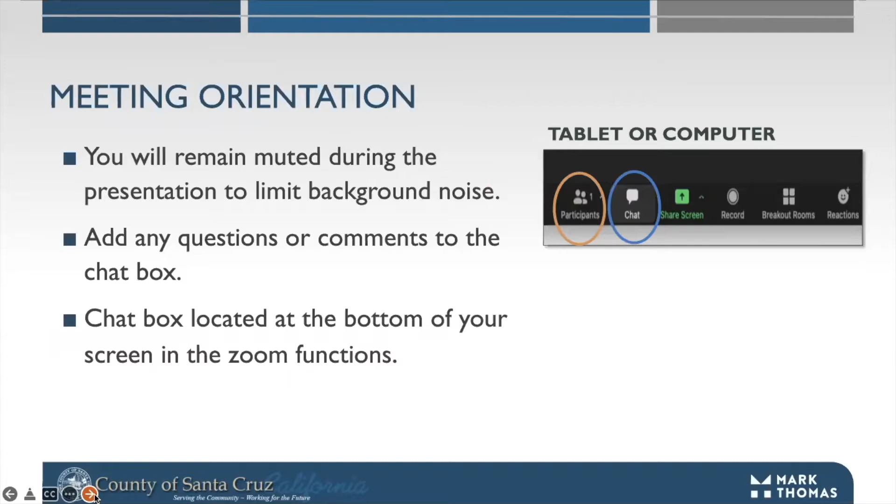So now I'd like to introduce who's on our project team. They'll be able to wave and acknowledge themselves as I introduce them. We have Russell Chen with Santa Cruz County, Tim Nguyen from Santa Cruz County, Steve Weisner also with Santa Cruz County, Jason Hoppin and Amanda Rotella both from Santa Cruz County, Sean O'Keefe and Dan Bloomquist with Mark Thomas, and as I mentioned myself, my name is Katie DeMayo, and my colleague Kayla Nick Kearney is with AIM Consulting.

I'm so honored tonight to welcome our next guest. We have Supervisor Zach Friend from the 2nd District to give us some welcoming remarks.

Thank you, Katie. I'm excited to be here tonight to talk about these remarkable possibilities that we have, not just along the Soquel corridor, although that's the focus of tonight, but this overall project funding, the congested corridors funding, is the largest investment in transportation equity and safety in our community's history. It's a pretty significant investment from the state of over $100 million.

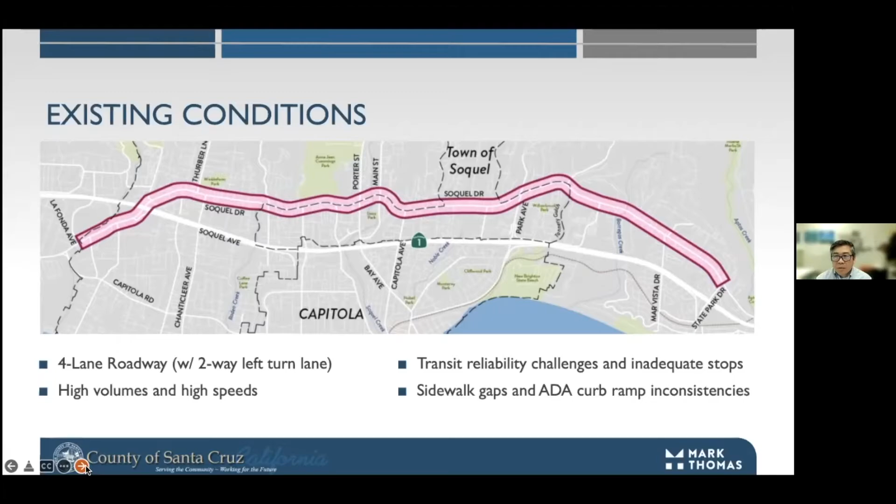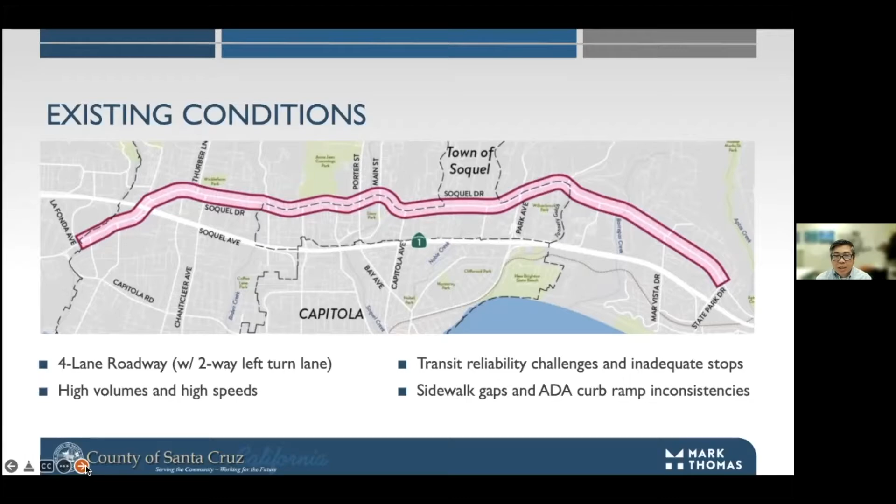We also have high speeds despite a 35-mile-per-hour speed limit. We have transit delays due to congestion. We have existing sidewalk gaps and ADA ramps that were built to previous standards. Those are general existing conditions on Soquel Avenue and Soquel Drive.

Now I'll go into the project goals.

One of our goals is safety, and one of the safety goals is bicycle safety. Santa Cruz County ranks near the top for California counties for the highest number of bike crashes. Something we're not proud of, but this project will help.

We also want to reduce traffic congestion, which will increase corridor throughput, reduce greenhouse gas emissions, improve emergency response times, improve access to housing, jobs, schools, and medical facilities. We also want to improve active transportation connectivity and promote sustainable development.

Next slide, please. Some background information. This project is part of the Watsonville to Santa Cruz Multimodal Corridor Program that came out of the Santa Cruz County Regional Transportation Commission's, also known as the RTC's, Unified Corridor Investment Study. The study identified multimodal transportation projects on Highway 1, Soquel Avenue, Soquel Drive, Freedom Boulevard, and the Santa Cruz Branch Rail Line. The projects identified will provide the greatest benefit to the community.

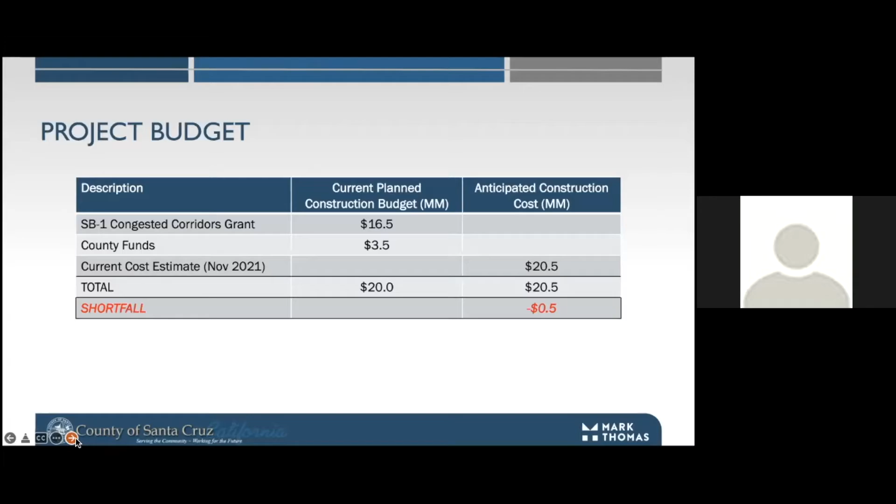The Santa Cruz County Regional Transportation also had extensive community outreach in developing this study. The county partnered with the Santa Cruz County Regional Transportation Commission on the Watsonville to Santa Cruz Multimodal Corridor Program and received the Solutions for Congested Corridors grant.

The grant amount was for $16.5 million. The county's matching funds were $3.5 million, for a total funding of $20 million. Construction estimate is about $20.5 million. There's a shortfall of about $500,000, so we're seeking additional funding, and also we'll be doing some value engineering on that as well.

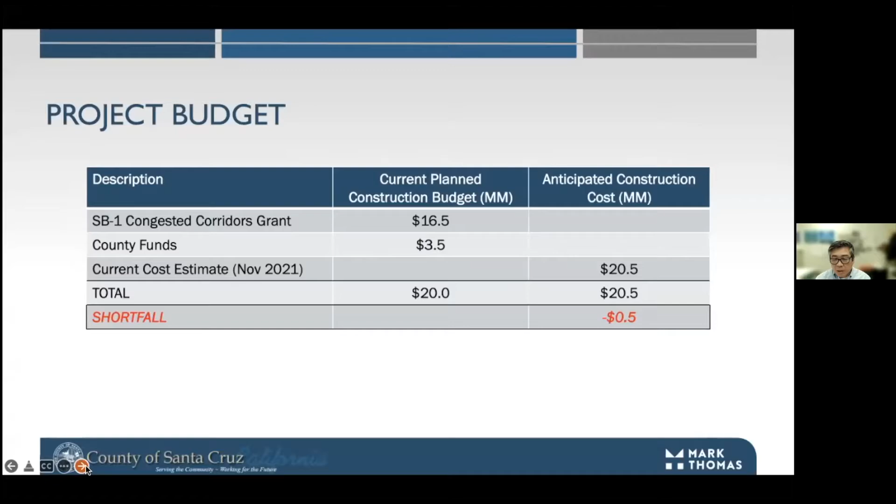With that, I'd like to turn it over to Sean O'Keefe, who will present the project overview. Thank you.

Great, thanks, Russell. As Russell mentioned, this is a little bit more detailed map. The project spans on the west side of La Fonda and comes all the way over to State Park on the east. It's important to note, as a general project overview, that this project is not proposing any widening along the corridor, and all of these improvements are happening within the existing curb line.

So it's really a reallocation of space within the existing facilities. While we are adding some sidewalks, gap closures, to increase network connectivity, we're not proposing widening to accommodate these facilities—more of a reimagining of what we can do within the existing space and the conditions we have out there in the field.

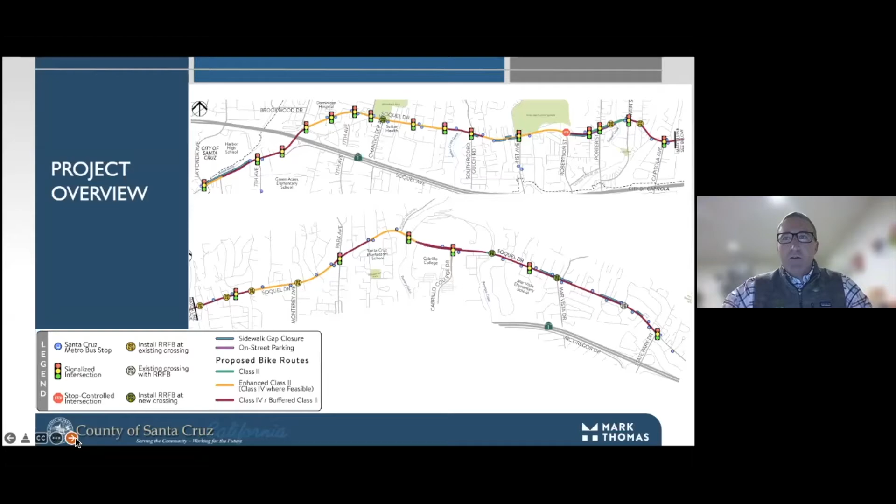As Russell mentioned, just over 5 miles in one direction—in this case we're able to get 5 miles of Class 4 as well as 5 miles of Class 2, for a total of 10 miles along the corridor. Our original plan had less Class 4, and we've been working with the Bicycle Advisory Committee and others to continue to refine our design. We've actually identified a few locations where we think we can enhance this even more and add more Class 4 to the corridor as we move forward.

So our goal is to put as much Class 4 protected bikeway out there as possible, but we are constrained in several locations where we're only able to put in Class 2 bike lanes with buffers. There are also 27 bike boxes along the corridor to enhance pedestrian and bicycle safety at the intersections.

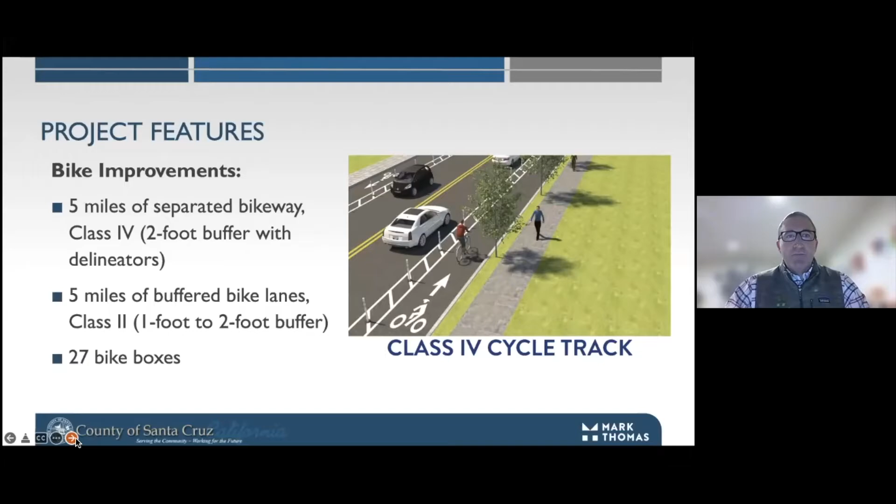Jumping over to the pedestrian improvements. As mentioned, there is sidewalk for most of the corridor. There are, though, some spots where it's a little bit more difficult, where there's some slopes that we're going to take care of and widen to accommodate that increased network connectivity from a sidewalk and pedestrian perspective. In this case, just over half a mile.

There's also some reconstruction involved as part of the project. This is mainly focused adjacent to Harbor High, and I'll get to more details on that and some of the other project-specific features. There's also lots of ramps along the corridor, and we're actually reconstructing 94 of them. Ramps have been improved over time, and our assessment and analysis as part of our design has identified another 94 that need to be upgraded to current standard.

Those will be located to coincide with the new overcrossings at Chanticleer as well as at Mar Vista, providing connectivity as you cross over Highway 1 with those improvement projects, as well as a new mid-block crossing adjacent to Cabrillo College. Next slide, please.

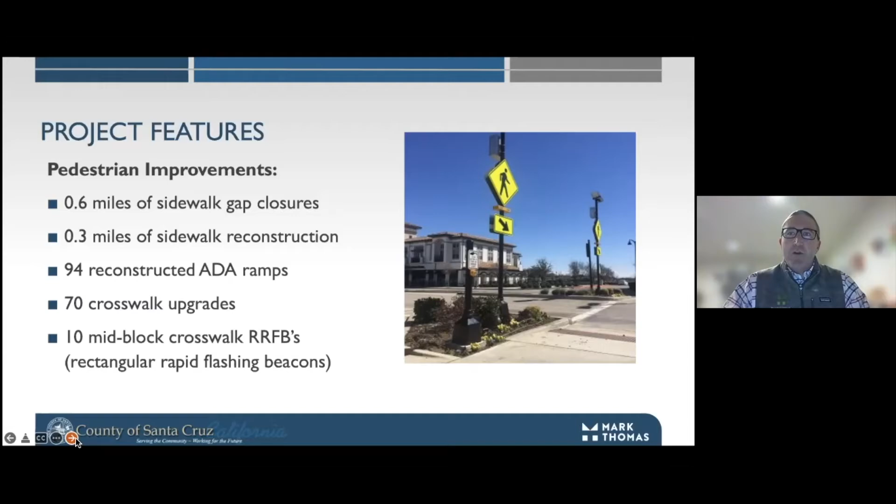Finally, talking a little more about the bus and vehicular improvements, transit signal priority will help with travel time reliability for transit, as well as adaptive signal control at 21 of the intersections across the corridor, linking those signals together to maximize throughput and reduce congestion along the corridor.

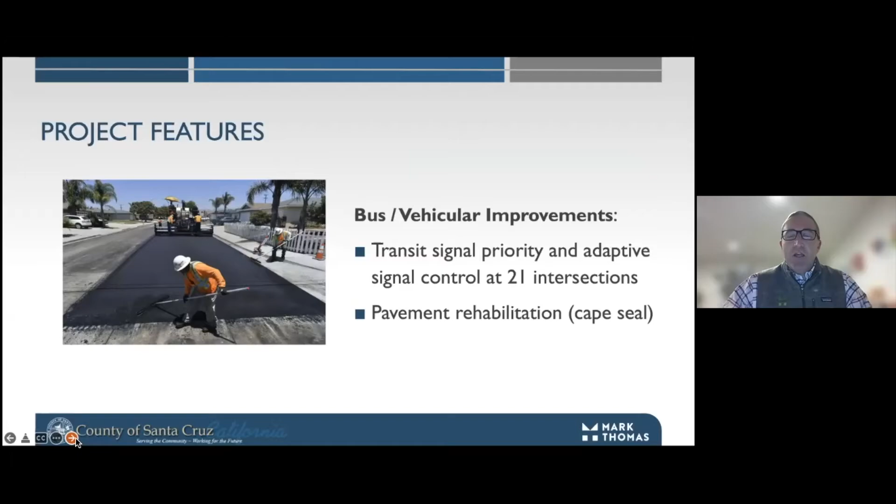And finally, we have pavement rehabilitation. In this case, it'll be a cape seal across the corridor to help protect the pavement and increase its longevity, as well as provide a blank canvas for the new striping that will really pop when the project's completed for motorists, cyclists, and pedestrians along the corridor.

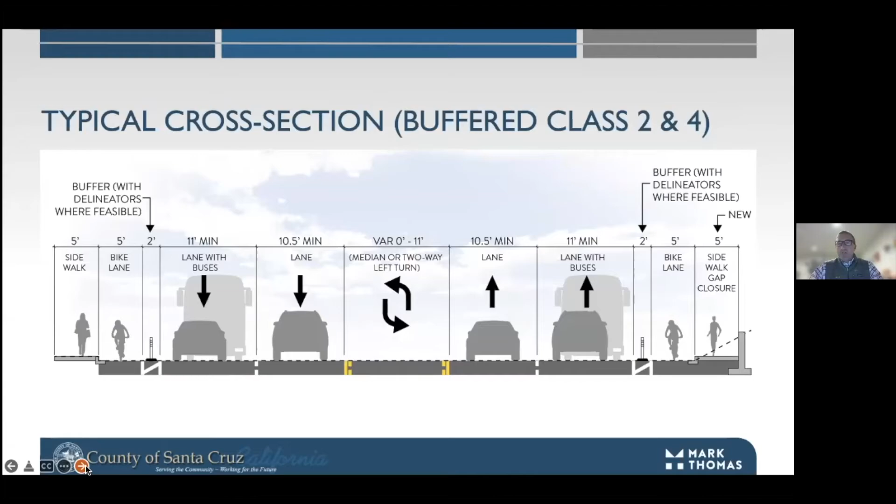Next slide, please. Here we have a typical cross-section of what we're working with out in the corridor. Again, I mentioned the reallocation of space. In this case, we'll be reducing some lane widths as well as the 2-way left turn lane where available to accommodate those buffered Class 2 as well as Class 4 facilities you can see. On the far right side, there's a little retaining wall needed to accommodate those sidewalk gap closures along the corridor in certain discrete locations. Next slide.

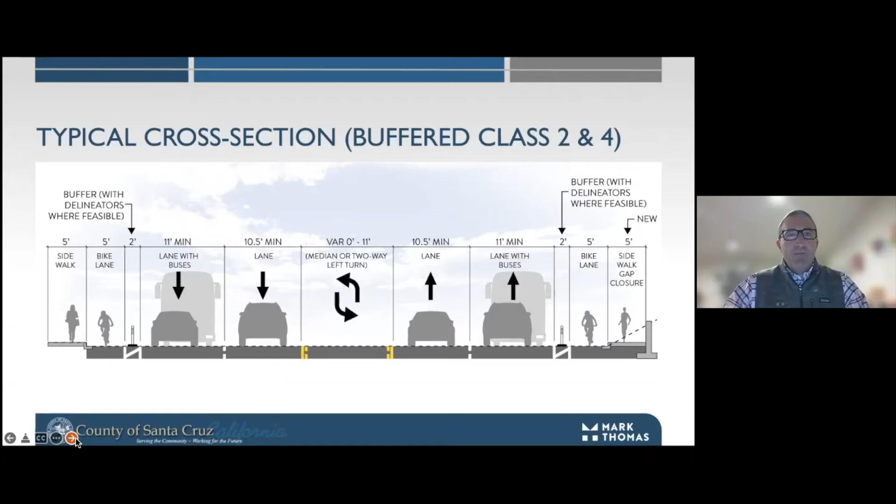Now I wanted to jump into a little bit more project specifics as we step through the corridor and some areas that I thought were important to highlight, just to provide a more general understanding of what it is that we're doing. In this case, you're going to see a big change as it relates to the parking in front of Cabrillo College.

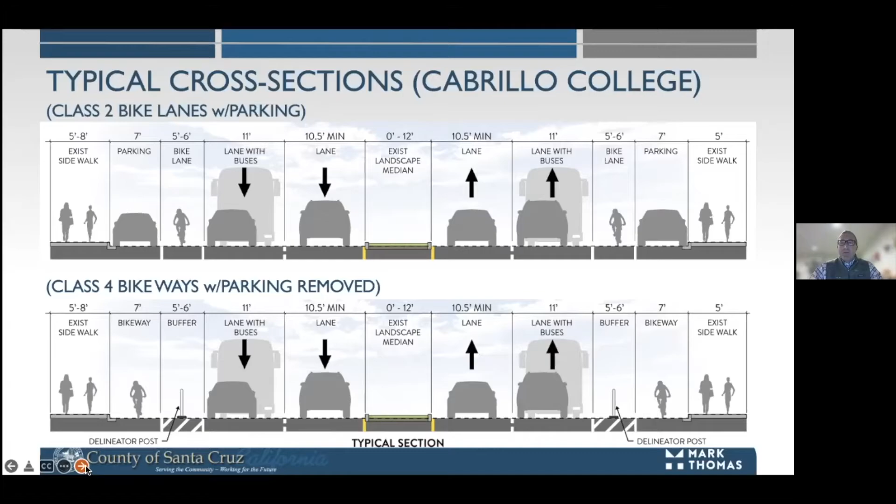Another important location is at 41st and Soquel. There's a network connectivity gap here, particularly at the southwest corner, so we're completing that sidewalk connection. Also, looking at the striping along 41st, we're going to reconfigure it to tighten up the wide right turn pocket at that location, hopefully to slow folks down and provide enhanced safety at this intersection.

Another spot we felt was important to highlight is very congested in Soquel Village. We're very constrained through this location. Some of the lanes are being narrowed down to 10 feet to provide for new bicycle facilities, as well as bike boxes for cyclists to cross intersections more safely. We have a standard bike box on Porter at the south leg, as well as two-stage bike boxes along Soquel Drive to increase safety and visibility for cyclists crossing through the congested area in Soquel Village.

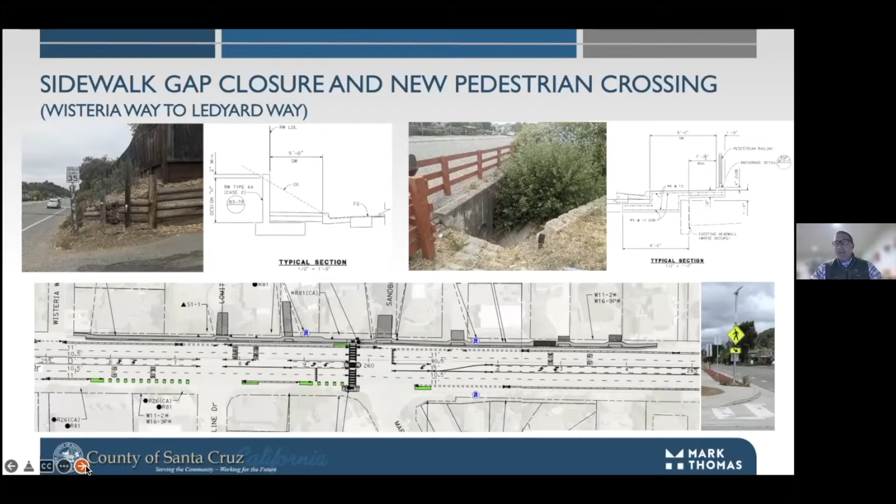We also have a unique feature here: a drainage culvert, shown in the second picture, that we'll address with a small cantilevered structure over it to provide sidewalk connectivity, along with a new railing at that location. You'll also see a new mid-block crossing—visible at the top of the bottom image—at Mar Vista, which will allow connectivity to the new overcrossing over Highway 1.

We also wanted to update everyone that there will obviously be impacts as part of construction, as with every project. The anticipated shoulder closures are for the areas where we need to install the sidewalk gap closures, but there should not be long-term lane closures as part of the project—just shoulder closures to allow for sidewalk construction. Otherwise, everything else should be completed without closing lanes for a significant period, allowing throughput to remain and hopefully not increasing congestion too much as this project is constructed.

You will likely see some temporary lane restriping in those areas where we have sidewalk gap closure construction that needs to be completed, as well as impacts and closures to some side streets and driveway access while we're doing the demolition, creating the formwork, pouring the concrete, and letting it cure in those locations affected by the new sidewalk gap closures and increased connectivity.

In those locations we can also anticipate some intermittent utility service interruptions for water and power. There will need to be adjustment of boxes, as well as a couple of poles that will need to be relocated along the project.

But we are focused on maintaining bicycle and pedestrian access throughout the corridor, especially in those locations where we're rebuilding the curb ramps, providing a secondary access or at least a way to get around at the intersections so we're not impeding access for bicycles and pedestrians.

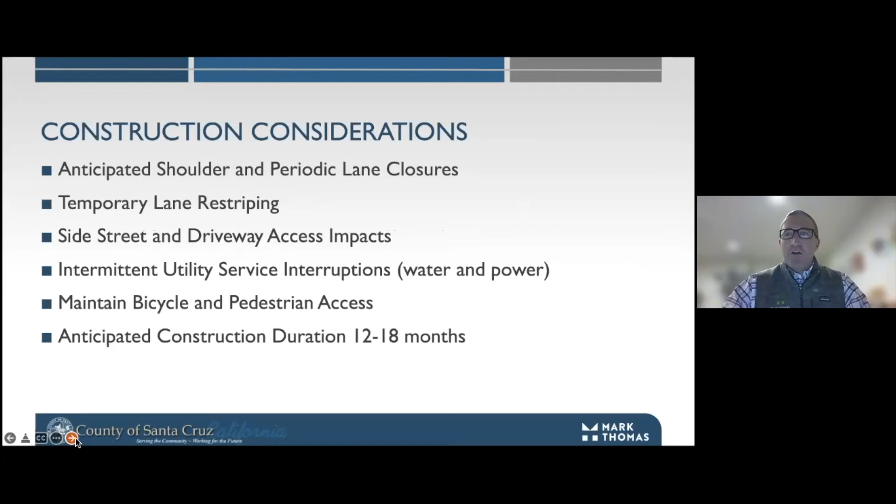Our anticipated construction duration is approximately 12 to 18 months. We're hoping it's on the shorter side but wanted to provide some flexibility, since rain days and other impacts during construction are sometimes out of our control and can elongate the duration.

Next slide, please. And finally, jump back.

Finally, touching on the project schedule and where we've been: our preliminary engineering was completed towards the end of last year, with final design completion anticipated for February — it's next month, coming very quickly. We're working hard to get this out on the street for bidding, with right-of-way acquisition coming in spring of 2022.

Bringing all of that together, we anticipate the start of construction in summer of 2022, with the anticipated duration being 12 to 18 months, hopefully completed in time for Christmas 2023 at the latest — that's our current schedule as shown.

And with that, I'll turn it over to questions.

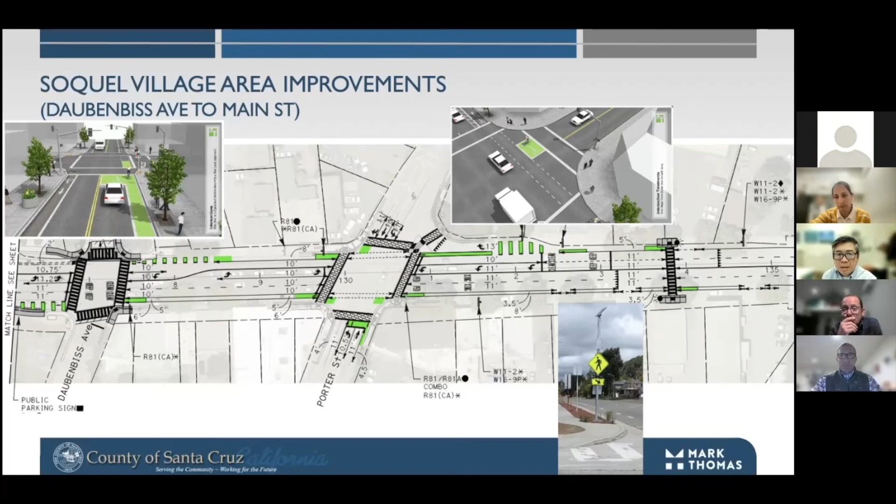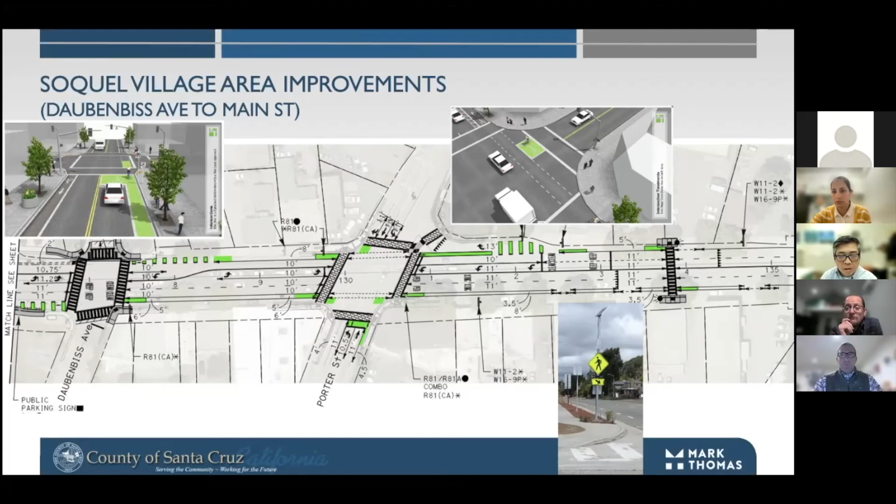Specifically, where are the new crosswalks? So we have one at Chanticleer, where the pedestrian overcrossing will be going in, and then also at Mar Vista, another pedestrian overcrossing. And then over at Cabrillo College, we have another one going in over there. I don't know if we can show where the Cabrillo College one is. Yeah, go back to maybe slide 6 or 7, I think it was.

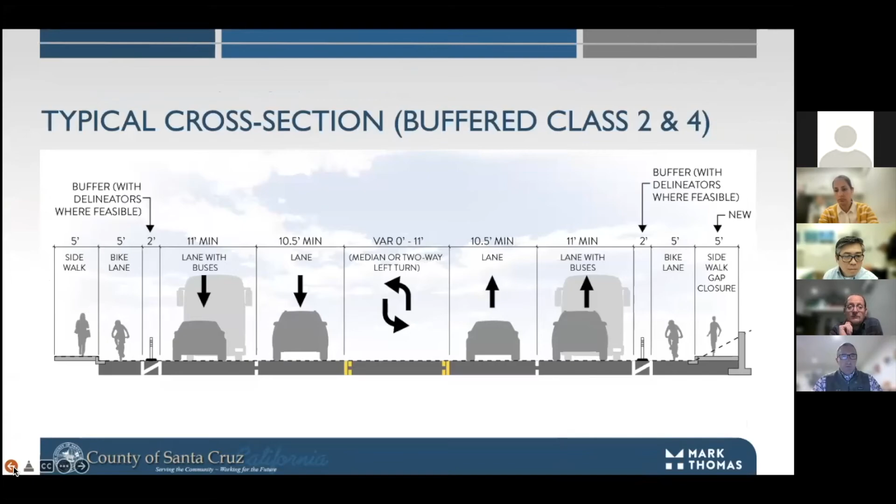What are the plans for a crosswalk at Merrill and Soquel? I'm going to kick that over to Sean. I'm not familiar exactly with that location. We typically refer to it as the Willowbrook crossing, and we did look at that initially with the concepts, but ended up dropping it due to concerns over sight distance as well as cost.

Next question: did I hear correctly that the lanes in Soquel Village area are going to be reduced in width to 10 feet? My concern is that this is already a very congested area with one of our fire stations nearby.

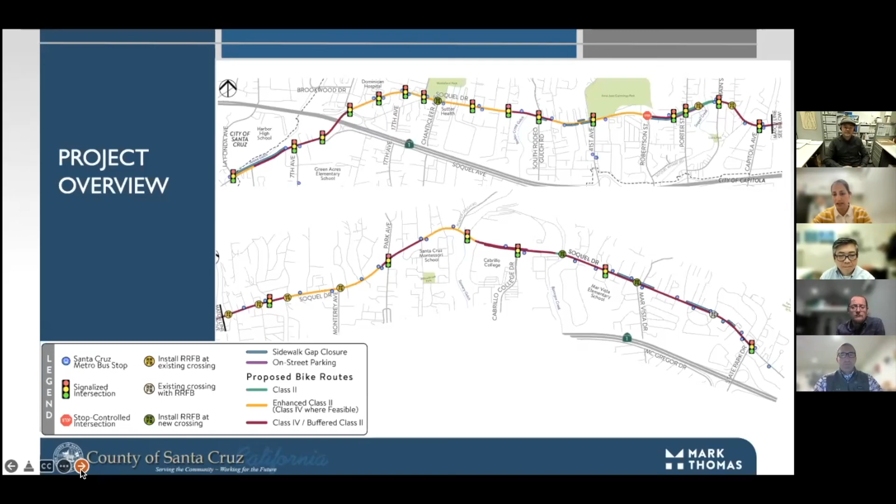All right, we've got another question. Was there any consideration for closing a traffic lane to gain more width or reserve as a transit lane? No, there wasn't consideration of closing a traffic lane. We felt that the amount of traffic on Soquel Drive didn't allow us to reduce the number of traffic lanes.

Wonderful. All right, so you can see on the slide here, and I'll get right back to those questions, but you'll see we do have our contact information for Amanda Rotella at the county. She has her direct email here, as well as our project website. Any future engagement opportunities will also be on our website. And for right now, it looks like those are all the questions that we might have.